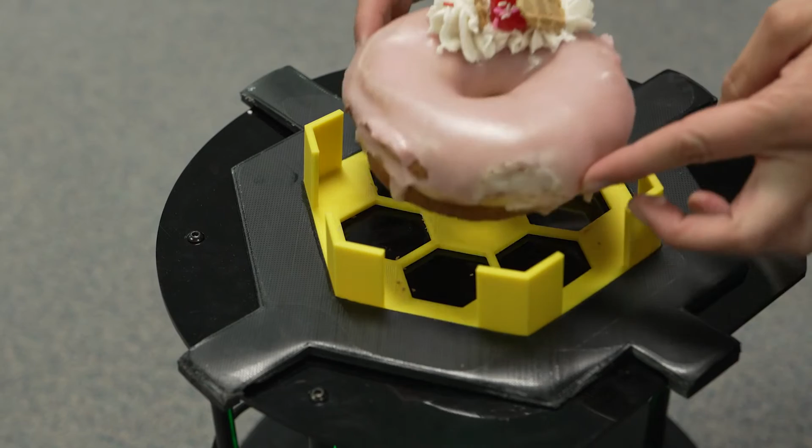Before we begin, if you're new to TurtleBot 4, make sure to check out our previous tutorial, which will walk you through all the steps to get set up with your new robot. Today we are using our TurtleBot 4 standard model, as it's got this mounting platform for which we've designed and 3D printed a donut holder device that snaps right onto the top. If you are looking for the design files for this, they will be linked in the description below. We've also got a computer running a Linux environment, as well as a package of a half dozen donuts from our favorite local donut shop, Lady Glaze.

Now that our robot's turned on, we're going to go ahead and launch our SLAM toolbox, and we will do that by opening a new terminal and running this line of code.

SLAM will allow our robot to create a map as well as localize itself within a map at the same time. There's two different kinds of SLAM supported by the TurtleBot 4: synchronous and asynchronous. Today you'll notice we're using synchronous SLAM, and this will use a little bit more processing power, but it will help us create a better quality map overall.

After we've launched SLAM, we're going to open another new terminal and enter this line of code to launch RViz. RViz is a program that will allow us to view our robot as well as its location on our map when we're both generating the map and navigating today.

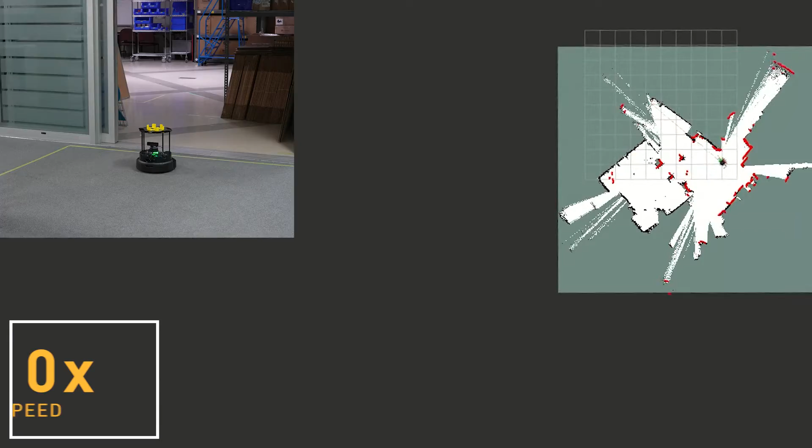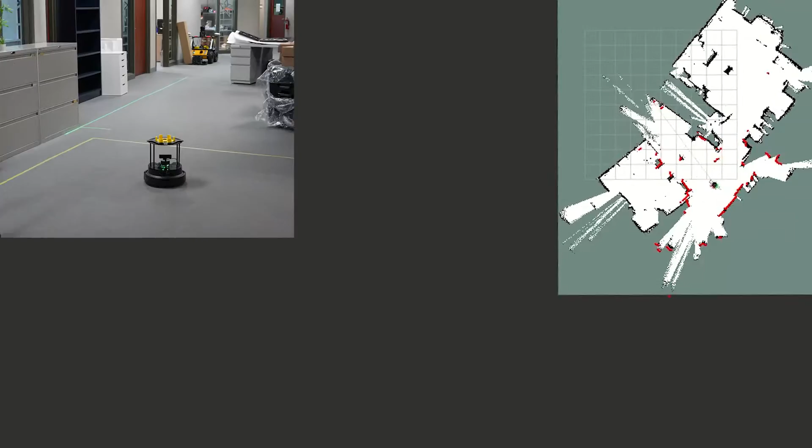Now we need to create a map of our environment for our TurtleBot 4 to navigate. To generate your map, you will need to place your TurtleBot on the ground and use your controller to drive it through your environment. You can monitor its completion by using RViz. Two important tips to consider: clear out any objects in the area that are below the lidar of the TurtleBot, as it's a 2D sensor and won't be able to see them. Also, try not to have anyone walking around while you're mapping, as they could show up on your map.

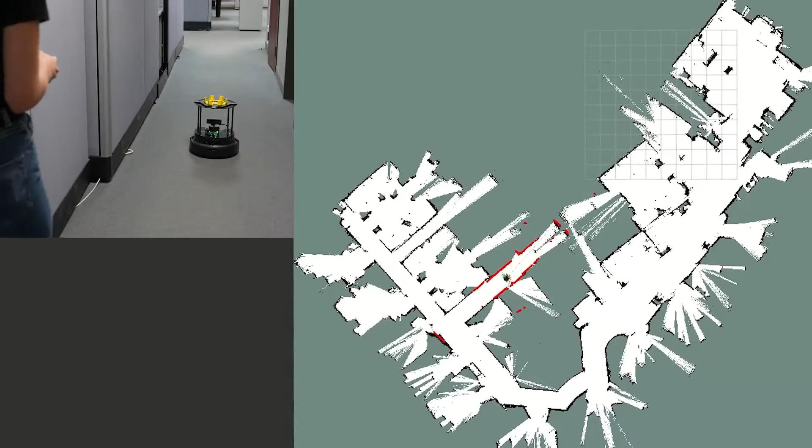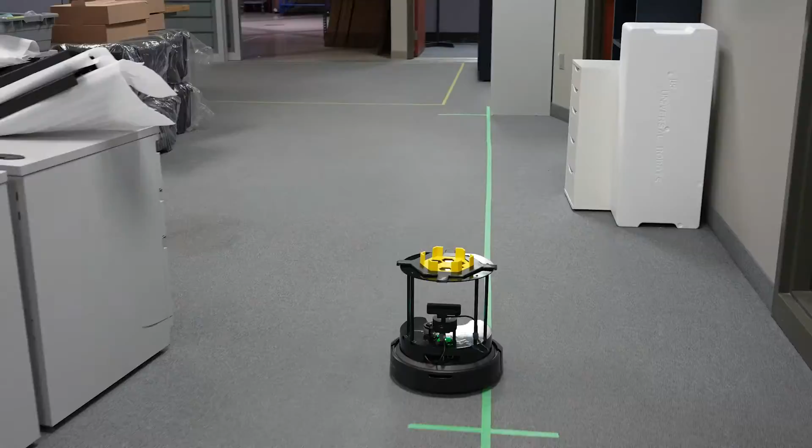Now the robot is using the integrated 2D LiDAR to build the map. The LiDAR is scanning 360 degrees and can detect objects up to a range of 12 meters. The red marks on the RViz map indicate the objects that the LiDAR is currently detecting.

Now that our map has been created, we will save it by running the following line of code. Once the map is saved, it will generate an image file with this naming convention, and it's always good to give that file a check and make sure you covered all the areas you want to navigate. Also, a file with this naming convention is created, which we will reference when setting up our navigation in the next step.

Now that we've saved our map, we can go ahead and create our donut delivery route. We'll do this by launching the ROS nav2 stack using this line of code. Just note to replace the map name in this line with the map name you saved in the previous step. So the first donut we're going to be delivering today is to Trevor, our TurtleBot 4 builder.

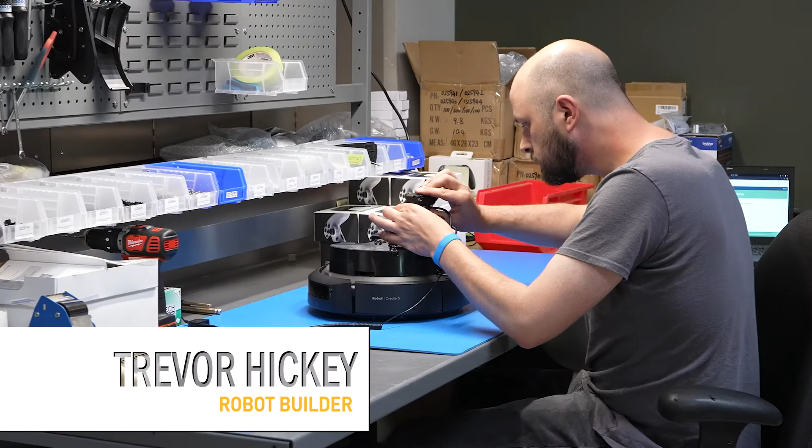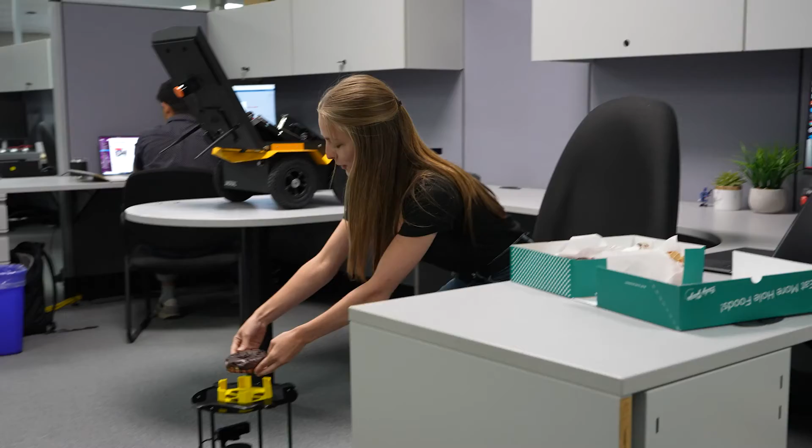We'll get out our donuts and load it on top of our TurtleBot. Awesome. Now we're going to open up RViz in a new terminal using this line of code.

At the top of the window, we're going to see three different buttons. The first button on the left side is called the 2D pose estimate, and we will use this to set the approximate initial location and orientation of our robot, or the pose of our robot.

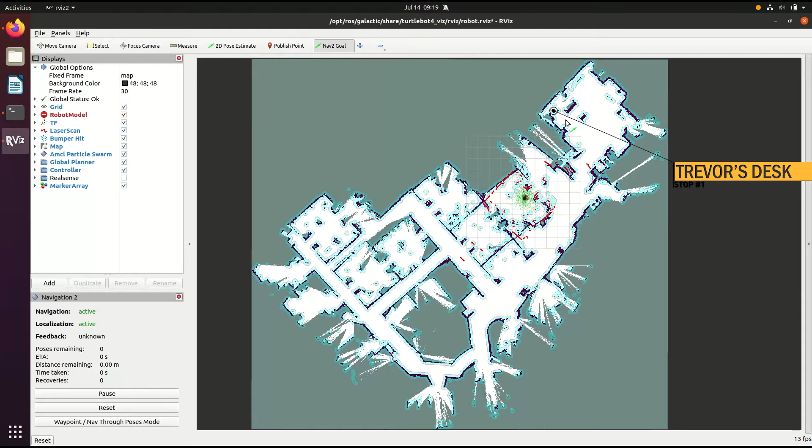Next, we will click the nav2 goal button, and we will set our goal pose for the robot to be over by Trevor's desk. Once we click that, the nav2 stack will start right away and create a path towards your goal pose and navigate the robot over to the goal.

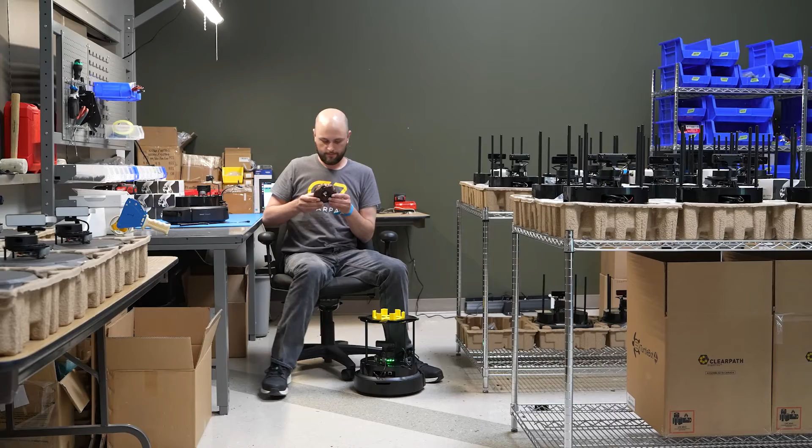So our next donut is going to go to Adrian. He's our TurtleBot 4 mechanical designer. So we're going to go ahead and load that up on our TurtleBot and send it on its way.

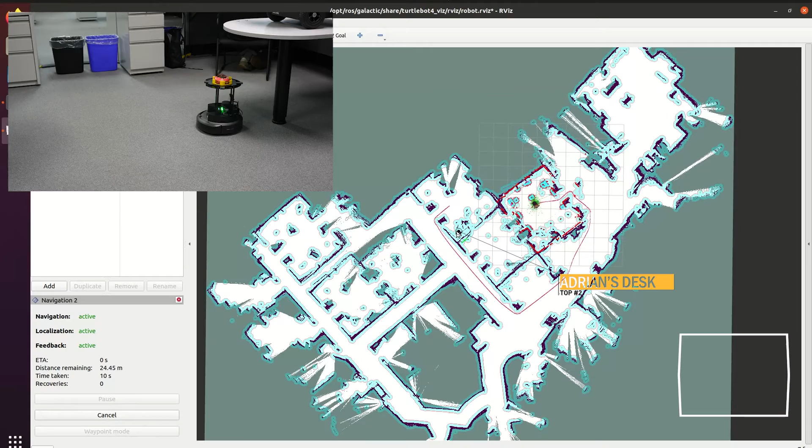The red line shows the planned path of the robot, taking into consideration obstacles. The robot is constantly evaluating its path and will try to find the quickest way to its destination. You'll also see the light blue bubbles along the walls. These bubbles have the same radius as the robot and show where the robot can't go.

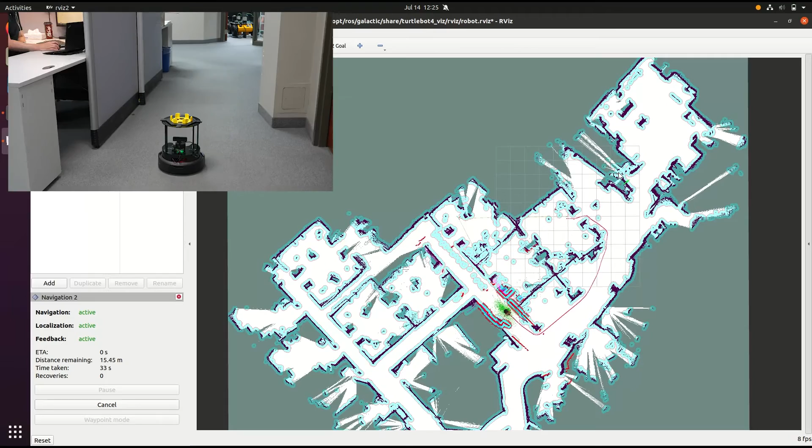So now we've officially successfully completed two autonomous navigation missions with our TurtleBot 4. Hopefully Trevor and Adrian are off enjoying their donuts right now.